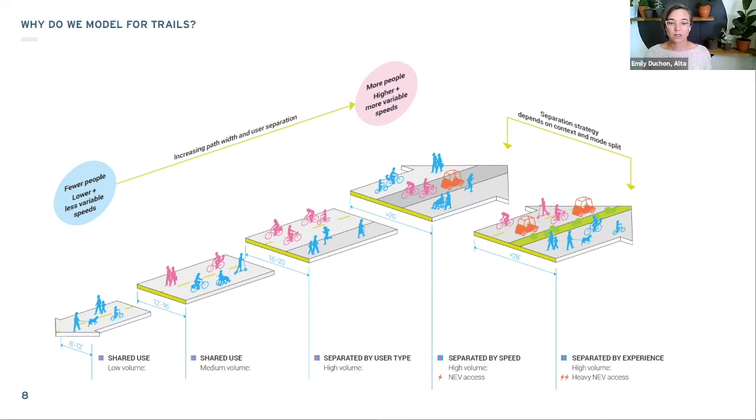So the tools we're going to look at and talk about today will help us really understand those users and quantify demand and mode splits so that you can efficiently plan and design a resilient trail. There are lots of tools that apply to a range of scales and corridor types, and each project benefits from using a number of these tools, as they all provide answers to different types of questions. They also require differing data inputs.

So I'm going to hand it over to Mike, who will be highlighting a number of the tools most applicable to trails.

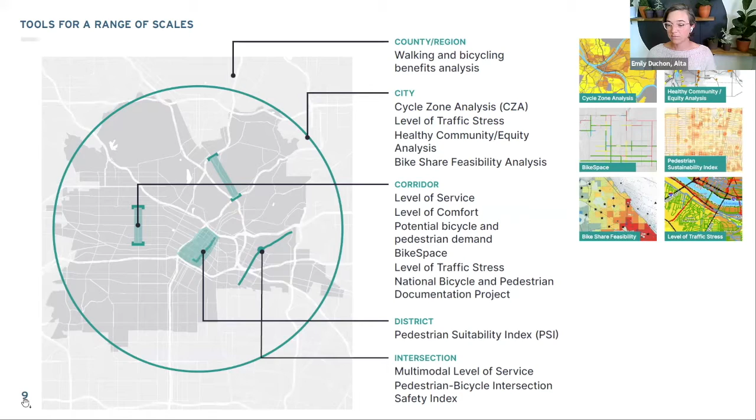Thanks, Emily. So I'm going to talk through some of the data sources and tools that we use, at a pretty high level, and then happy to answer any questions for more specifics in the Q&A or through email afterwards. So one of the first main data sources we use is census data.

This gives us the ability to understand who is near and may use a trail. One of the main sources there is the American Community Survey. This is often what people mean when they just say census data. It's an annual survey that asks people questions about where they live, their income, how they travel to work, and things like that. One of the limitations is it's just looking at where people live.

So we like to supplement that with other data sources, one of them being the Longitudinal Employer Household Dynamics survey, or LEHD. That looks at where people are working, and then we can tie back their characteristics about where they live, so we can understand if people working near the trail have short commutes or long commutes, and that can help us understand who might use the path.

A couple of things to keep in mind about this data source: there is a lag time. ACS data, or American Community Survey, is a 5-year sample when looking at census tracts around a trail, and even the most recent year of data is 2 or 3 years old by the time you get it processed. So in areas that have changed rapidly, you'll need to use other data sources, such as counts or surveys, to really understand those changes.

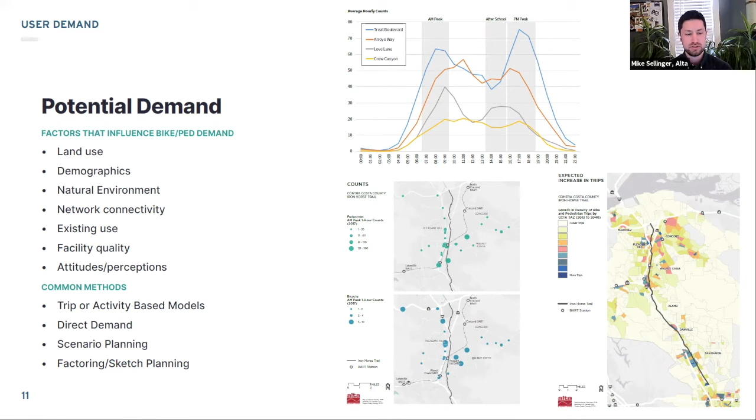Switching gears a little bit to a different tool, I want to talk about the FHWA Shared Use Path Level of Service tool. This is a publicly available tool, anybody can download it, and it lets you look at how wide the path should be based on demand estimates and the user mode split you expect. The way I like to think about this tool is it's how much water you can fit into a pipe and move it efficiently. So this is a really good tool to use when you're starting out, to think about those design qualities of how wide a path would be based on expected users and demand.

One thing it doesn't account for is other aspects of user experience. It also kind of presupposes the purpose of this trail is just to move people as efficiently as possible, which for many trails it might be, but there are other situations where we really don't care as much about that perfect efficiency—we're designing for a mix of uses, and it's okay if people are mixing and moving slower and there's some more conflict.

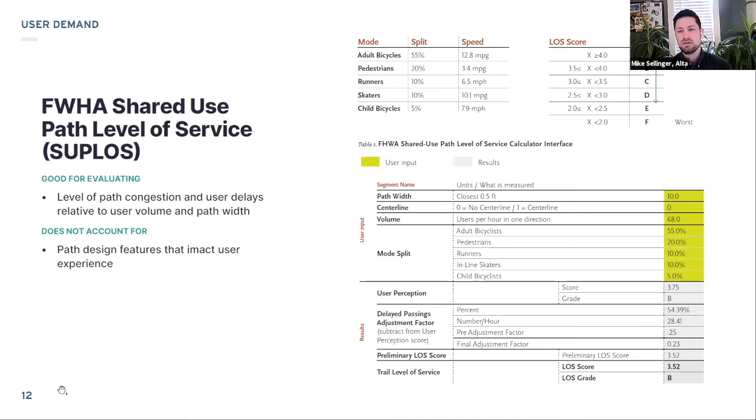We have different scores for things fully separated from traffic, or an unprotected crossing, versus a fence next to a train, and that will result in a different score. We also look at things like slopes, how steep it is in terms of average slope or max slope in different sections.

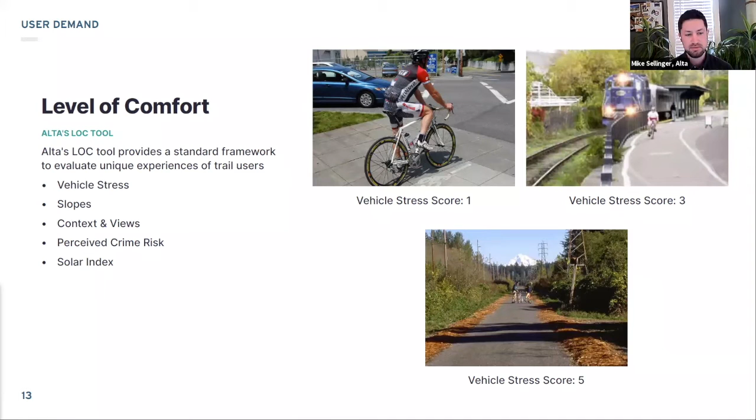And then thinking about the context and views, what's the surrounding land use experience going to be like? Is it a crowded waterfront or perhaps more of a recreational trail through a park? And then finally, also looking a bit at perceived crime risk and the solar index.

The final thing I want to talk about today is benefits analysis and how we think about the benefits of trails. This has two really key pieces. First, trails provide benefits throughout the community, and I think that's something many people who do not see themselves as a trail user, or haven't used one in the past, don't fully understand. So we can use this benefits analysis to show how trails are impacting the community-wide in things like air quality and health benefits.

And then the second one, as Emily mentioned, is it's really key for funding. Many grant programs, including BUILD grants, which will have new guidance coming out any day now, require a cost-benefit analysis. So this is a key piece if you're looking at funding trail projects through many different grant programs. And the way we typically look at these benefits is breaking it into three broad categories.

The first is health and environmental benefits. We know that a certain number of trail users are replacing motor vehicle trips with those trips, so that's going to have environmental benefits in terms of air quality and reduced greenhouse gas emissions. It's also going to have health benefits in terms of newly active users, people who would not have been meeting physical activity guidelines before and are now getting more activity.

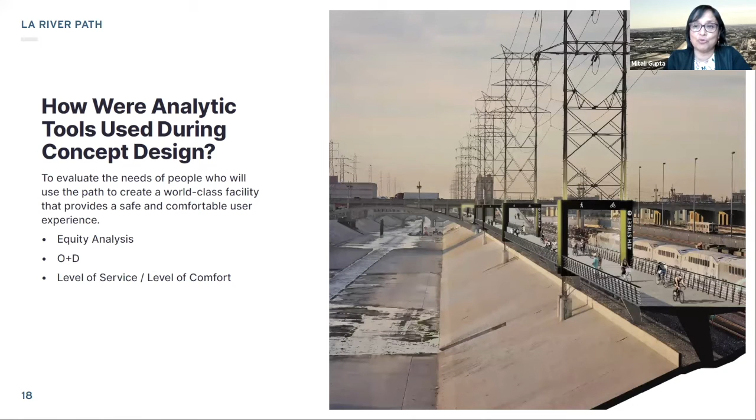So, with regards to equity, Metro developed and adopted an equity framework in 2018, and currently, back in 2021, we have equity tools which we will be using in evaluating the trail-oriented communities for this project. This is a Metro board adopted policy that applies to all our transportation projects regardless of mode.

So what we are doing is looking closely at equity and what that means and how it informs our projects, both in terms of which ones to advance and how they are designed. The equity platform threshold is supposed to promote consistency within our projects agency-wide. It looks at low income, non-white population, and zero car households as the most reliable metrics for identifying equity communities. Our equity neighborhoods are low income, having greater than 80% non-white population and greater than 10% households with zero car ownership.

Plus, we also looked into the origin destination in terms of where these people are coming from and where they are going to go.

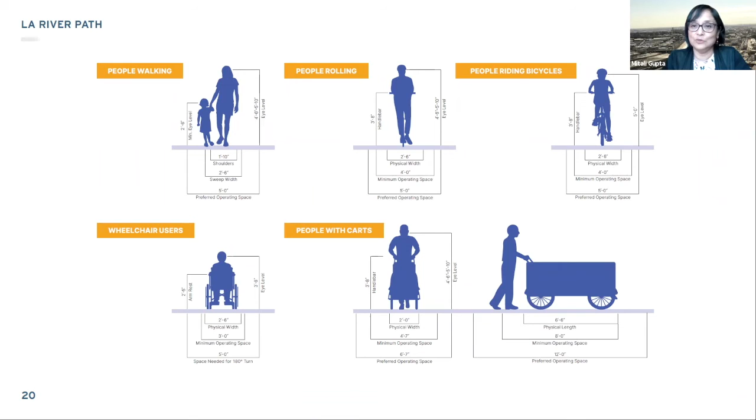So really, other than the southern stretch of the corridor, there are only a few spots where we can use existing land, because for the majority of the 8 miles, there's really not much available piece of land where we can put this trail on.

In this case, we are also finding in some locations that the demand exceeds the width of right of way that we have on top of bank. And so we might have to go across onto the river on cantilevered structures, even for top of bank.

In the most constrained areas where there is absolutely no available right of way, we are looking to possibly cutting into the trapezoidal channel walls and creating a path along the river channel itself, partially down on the channel wall. We're calling it the incised path.

This is going to be evaluated from a number of perspectives, especially how high it will be and how it might be impacting the main objective of the river, which is serving as a flood channel. At the same time, making sure that people are safe on such a path, because it is halfway down the channel. On the other hand, this incised path is a great way of creating space out of nowhere, and getting around some of the bridges, it might be the most efficient way of maneuvering the bridges.

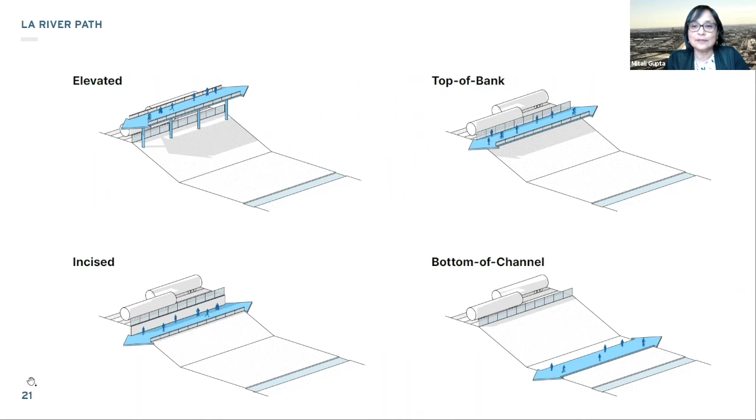Next slide. So like we considered different path typologies, we also considered the use typology, depending on the width of the river, width of the path, whether that be shared or separated use for a variety of different path widths. Overall, along this 8-mile corridor, we're really looking at employing a context-sensitive and context-specific design based on the demand analytics.

Anywhere along the 8-mile corridor, in some spaces this will be shared and sometimes it will be separated, as I mentioned. So this 14-foot path that we are looking at is on the smaller end of a shared use.

It has to be kept in mind that when we are talking about shared use, it would be used by bicycles as well as people walking, and they may or may not be responding to the needs and demands of the path. So we have looked at various alternatives: a 14-foot, a 16-foot, an 18, and a 20-foot path width. So moving to the next one.

Is this the 16 feet? Yeah. So this is the 16-foot shared use, which is slightly wider, 2 feet wider than the 14-foot path. It gives a little more room for people to spread out, and this is going to work in a few more areas than the 14-foot.

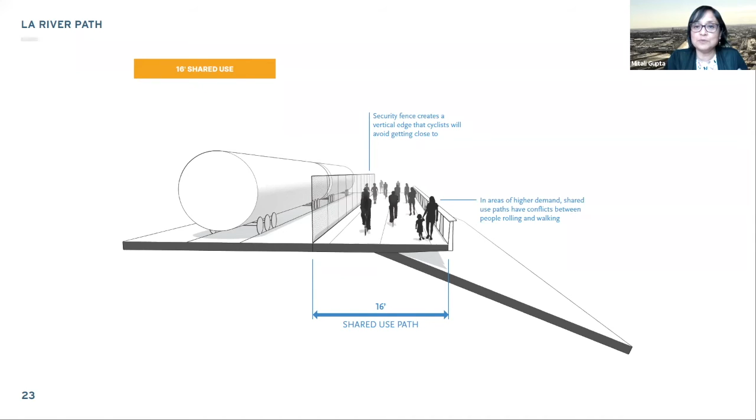Again, it may not be able to accommodate the entire need for the path, so we have two types of separated use, and that'll be the next two slides. So an 18-foot, and I will talk about the 20-foot later. In this instance, we are looking to allocate 12-foot wide width for the rolling component, anybody on wheels, and a walking component of 6 foot wide with a 2 feet buffer between the two types of paths.

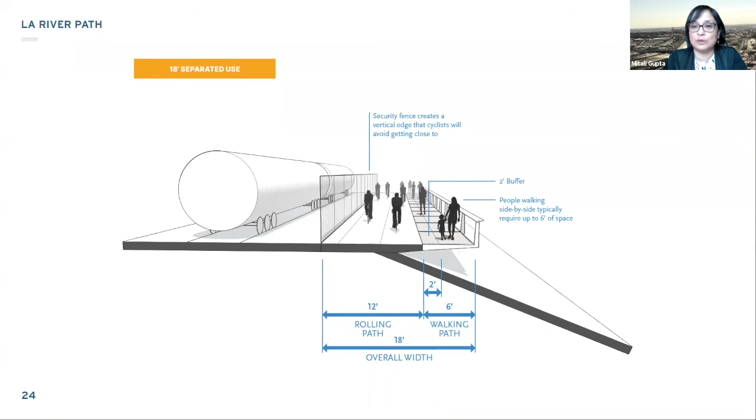Moving to the next slide, we have the 20-foot separated use. It's a 14-foot in this case for the rolling path and a 6 feet wide walking path. As you can see, it's such a constrained corridor that we are trying to create space out of nowhere, building a lot of this on structure, whether that be elevated structure or cutting into the walls or out onto the river.

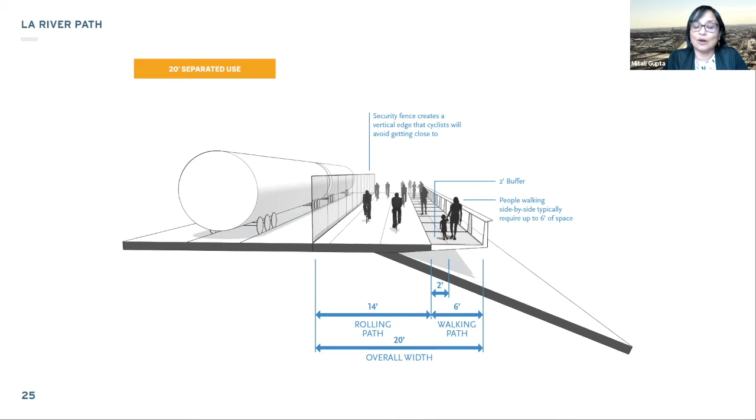So cost is a very important consideration. We are really trying to match our resources with the demands for the path. On that note, let me hand it over to Deven to take a deep dive on the origin destination analysis.

Thanks, Mitali. It's a great point for us to all consider. This corridor is highly constrained. A lot of it is going to be on structure, so every square foot is precious and costly. The purpose of the origins and destination analysis is to help us really get at demand and begin to balance demand with the overarching cost for the corridor.

Mike mentioned earlier in the presentation a range of ways to begin to assess demand. For this particular effort, looking at origins and destinations, we used a regression modeling technique balanced with some sketch planning to ground truth our findings, and began to identify where people are moving from and to, and how many people would be crossing our corridor or potentially replacing one of their existing trips by using our corridor.

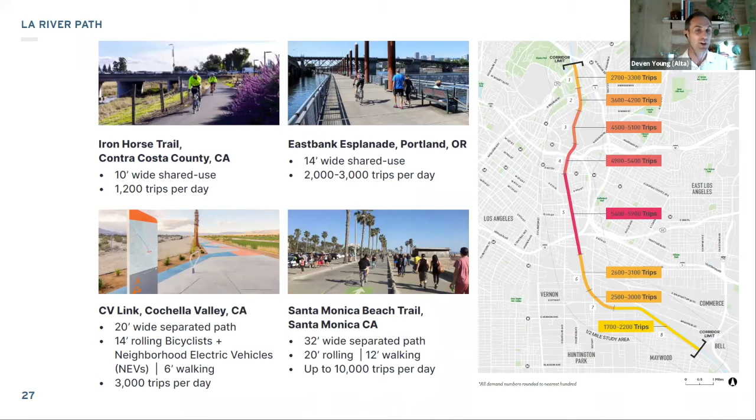So really substantial numbers. You can see what we're looking at for the LA River Path based on our O&D study is on the lighter side farther down in the south or up in the north, anywhere from 1,700 to 2,200 trips, to the most dense area in downtown, where nearly 6,000 trips occur. It's a substantial number of trips per day, and those trips translate directly to the path width that Mitali was outlining earlier, because we want to make sure the path we're designing for is going to accommodate that total density of demand.

And the way we were able to translate that demand into an evaluation of potential pathway widths, separated versus shared use, is by using the level of service model that Mike talked about earlier. He mentioned thinking about it as how much water can you fit into a particular pipe. That's what we were looking at here, using a shared use path, our total number of users per day based on demand, and really getting at how wide the path needs to be.

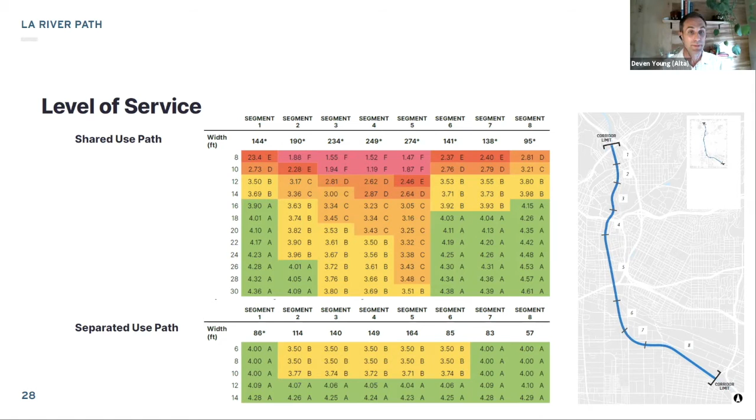You'll see in some instances where demand was exceedingly high, a separated use path is most appropriate, separating pedestrians from rolling modes to provide a safe and pleasant experience for all users.

The end result, taking the O&D estimate, working that through our demand analysis, and translating that to a level of service, results in a series of segments along the corridor. This validates what Mitali was describing earlier, that there's a range of different path types available, and it can't be a one-size-fits-all approach. Frankly, the budget won't accommodate that. So we're able to focus resources in areas of high demand, providing the best possible path typology and user experience.

You can see the pathway navigates from 16 feet wide shared use, transitioning to an 18 foot wide separated use, then getting as wide as 20 feet in the downtown core before narrowing back to 18 feet, and eventually to 16 feet shared use as it goes into the southern end of the project. It's important to understand that data storytelling arc of using all our O&D, and how that translates to actual design decisions.

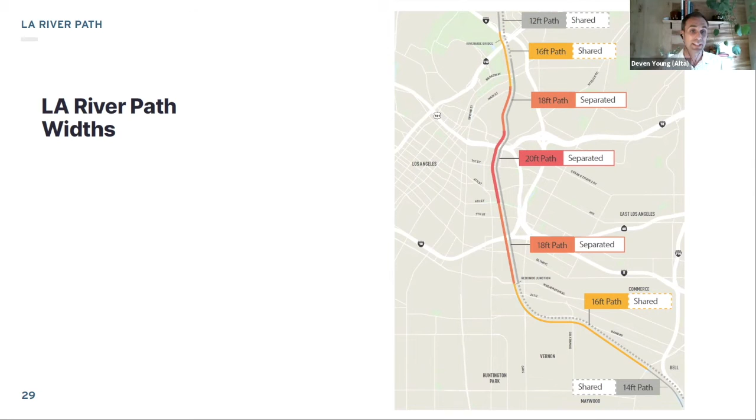Finally, an effort Mike touched on as well is level of comfort, and that's what we're beginning to engage in now. The project has developed 3 alternatives, and one of the components for evaluating those alternatives is using this level of comfort tool to get at the user experience. Thinking about things like level of service and comparing between the 3 alternatives, but also slopes, stress, number of junctions, land use context, or climate, to assess the quality of the user experience on each alternative.

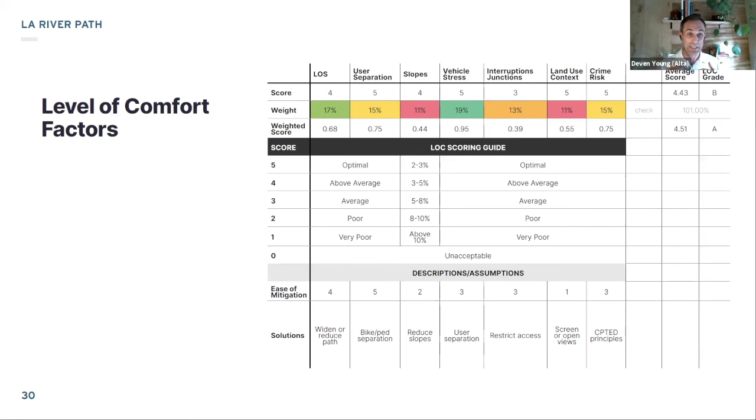This project is funded by Measure M, LA County's Measure M, and we are in the environmental phase. We're hoping to clear CEQA and select the locally preferred alternative, the LPA, by mid-2023, with the intent of opening this amazing project by the 2028 Olympics that Los Angeles is going to host.

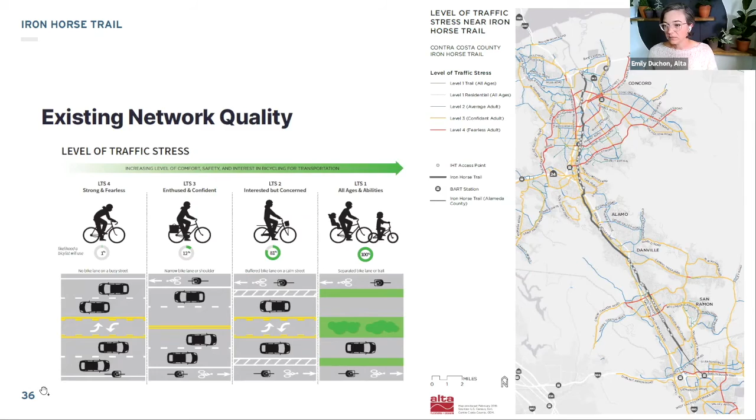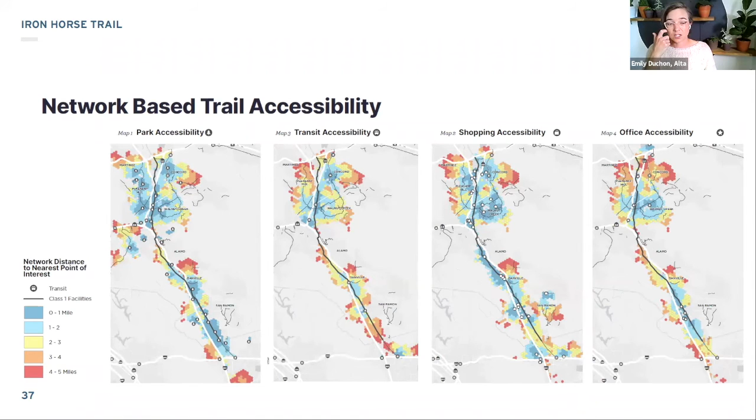We mapped the accessibility of various destinations based on using only low stress routes to get to the trail. These maps show greater accessibility in the blue colors. On the left, we're looking at accessibility to parks, transit, shopping, and office—again, from the trail to these destinations along the existing low stress routes.

We also looked at overall connectivity for people walking, biking, and using e-bikes, based on representative distances each mode will travel. What we found is that only about 35% of people who live in the study area are currently within comfortable walking and biking distance to the existing trail.

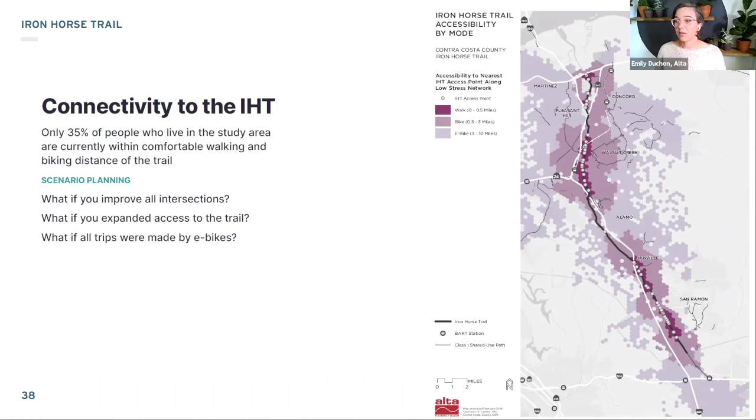Now that we had that as a baseline, we could use scenario planning to help assess what type of improvements would get more people to use the corridor. I'm going to go through three of the scenarios we ran. The first: what if you improved all the intersections along the trail? Would you get a lot more users if it was just a straight shot?

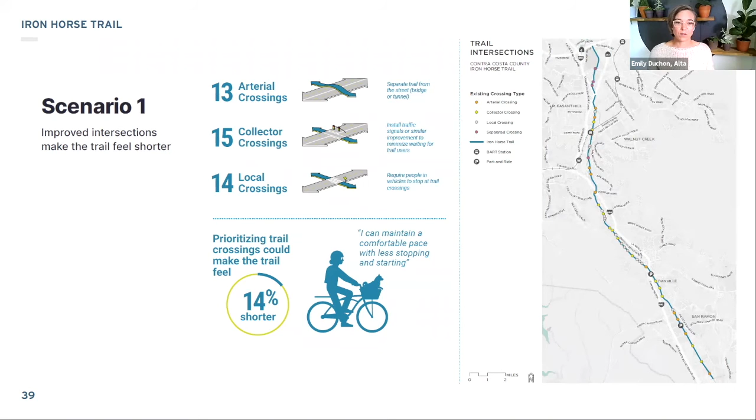That would mean grade separations for all arterial crossings, traffic signals at all collector streets, and at local crossings we reoriented the stop signs so people driving cars would stop and trail users would have priority. Using a measurement of perceived distance, it would only really make the trail feel 14% shorter. So these improvements don't have that large an increase in ridership, but really what they'd do is improve safety, which is equally important when our goal is to get more people onto the trail—we also have more people to keep safe.

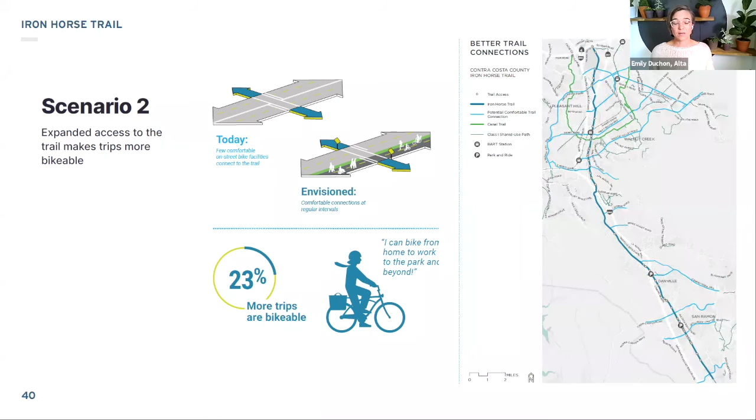In the second scenario, we asked: what if you built comfortable connections to all the trails? If we took all those high traffic stress routes and made them all ages and abilities corridors for people to access the trail, now we have blue and green lines on the map instead of red lines. You'd see 23% of all trips are more bikeable, leading to a more significant increase in trail demand. It really shows the importance of improving first and last mile connections to trails.

The third scenario looked at if all trips were made by e-bikes. We know people on e-bikes travel faster and make trips that are 22% longer than people on traditional bikes. When we ran that scenario, we found that 27% of all trips are bikeable. These scenarios help build the case and compare investments to benefits, using this as a tool to bring results to the community and stakeholders to help them understand the corridor's potential and the benefits of various improvements.

There's also a long-term interest in the Iron Horse Corridor to provide a new dedicated low-speed shared autonomous vehicle, or SAV, route along the corridor. Through this study, we did a preliminary analysis and found two key things that need to happen to continue that technology.

The first is to conduct community outreach to establish goals for a pilot project. Community members we heard are concerned about SAVs along their existing trail, and these concerns include safety, noise, and the potential to change the character of neighborhoods surrounding the trail. Anytime you're looking at taking an existing trail corridor and expanding it with new uses, it's best to really engage the community and get their feedback on the new vision of what a corridor needs.

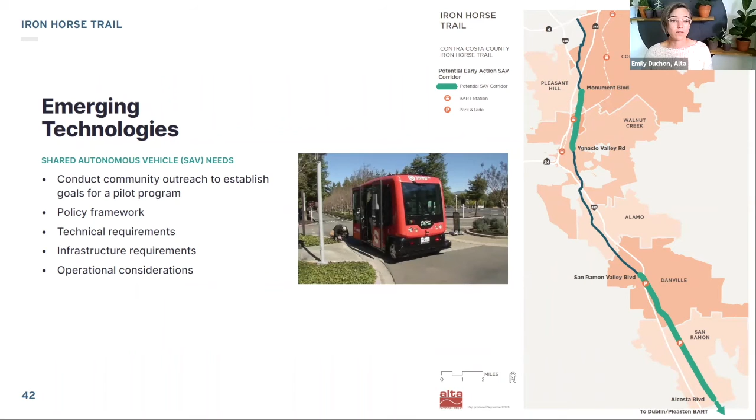So after we conducted all of the analytical work, we set up a framework for a needs analysis to really help establish what trail improvements were moving forward. The study recommended a 22-foot wide separated use trail, and also improving intersections, including some grade separations along the route.

Access enhancements included reorienting the front door of adjacent businesses to the trail corridor and focusing on developing some trail-oriented development. And finally, we recommended a new management approach, because when you transition a trail from a recreational trail to a transportation route, it needs to have the funding to support the operations and management for its new use.

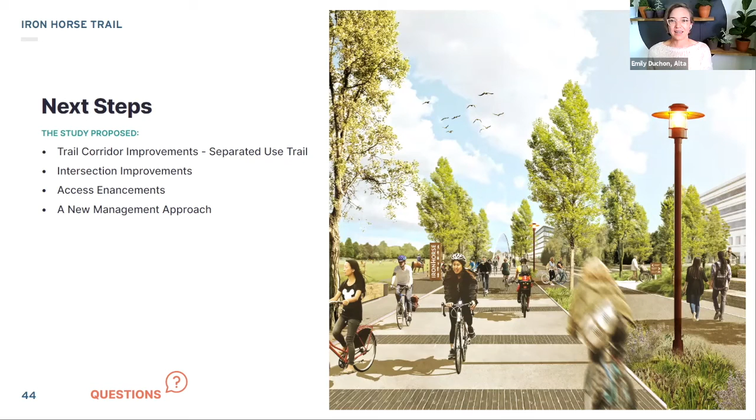Yeah, thanks. So we went from 8 miles to 30 plus miles to now 300 miles - definitely different scales and different overall character. For those of you who joined in on the Great Redwood Trail session, this will be a little bit redundant, so I'll be fairly brief.

This trail project, if you go to the next slide Emily, is a project whose feasibility component was studied as part of Senate Bill 1029 task force. It's really looking at the existing North Coast Railroad Authority's right-of-way and transitioning that over to a trail corridor. It stretches from the North Bay area all the way up into Humboldt County, to the small town of Korbel, which is close to Arcata. So it's a very long, very large trail corridor that's been assessed from a rail perspective, but this was really the first time to assess it from a trail perspective.

And the importance of this particular session is getting at this data storytelling - beginning to look at how you can collect the volume of data. All the other previous case studies had data available; we were in urban environments where counts either existed or we were able to go out and collect them. In this instance, all of that data needed to be collected firsthand, and it needed to be consistent across 300 miles.

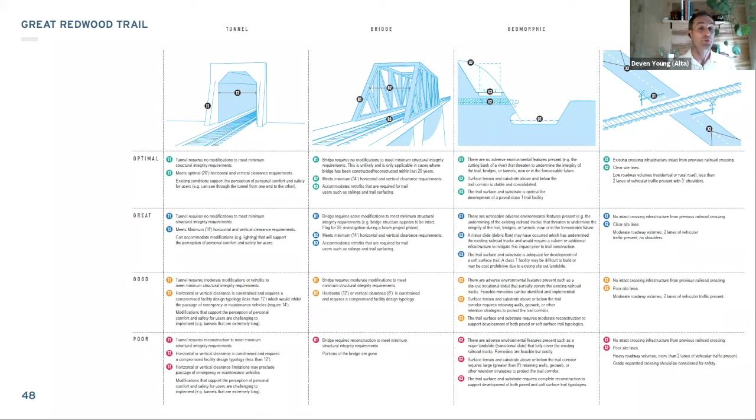This is a tool that will be uploaded and is available for others to use who are doing long trail corridor projects, to quickly approach something like a tunnel and assess: is it optimal, great, good, poor, and does it meet certain components and criteria? Keep in mind, over 300 miles, there were 3 teams deployed. We needed to make sure that each of those teams, navigating anywhere between 6 and 12 miles a day, were recording all of that data consistently.

We were able to, over the course of a few weeks, assess all 300 miles of this corridor, which keep in mind is very rugged in certain areas, in particular in the Eel River Canyon. So it was quite a feat, and we needed to be very efficient and consistent across this inventory.

The results of collecting these photos and this data was a corridor-wide map of all the existing constraints and challenges we were faced with. We laid this out as part of a larger roll plot presented to the Senate Bill 1029 Task Force team, but we also translated that into GIS, into a Google Earth KMZ with a whole photo inventory, so all the participants could fly through the corridor and get a sense for themselves of the conditions of the existing infrastructure.

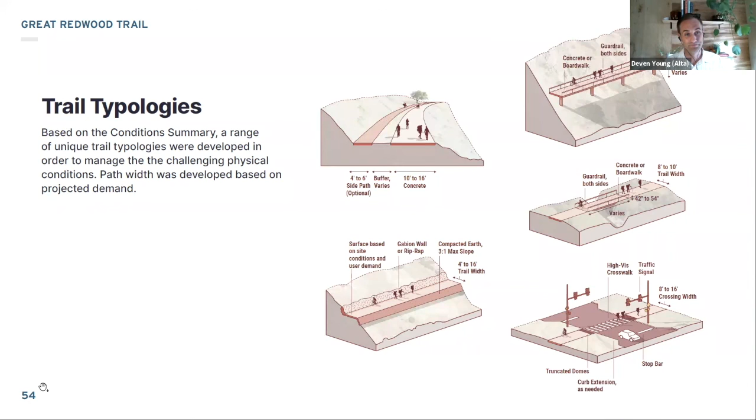With that, I'll close by saying this project just completed the feasibility study, and the importance of this particular case study is showing how you can collect that information right from the outset, how you can do it efficiently, and then how you can translate that together and turn it into a story you can tell as part of a feasibility assessment, and really begin to understand the overarching opportunities for your trail project.